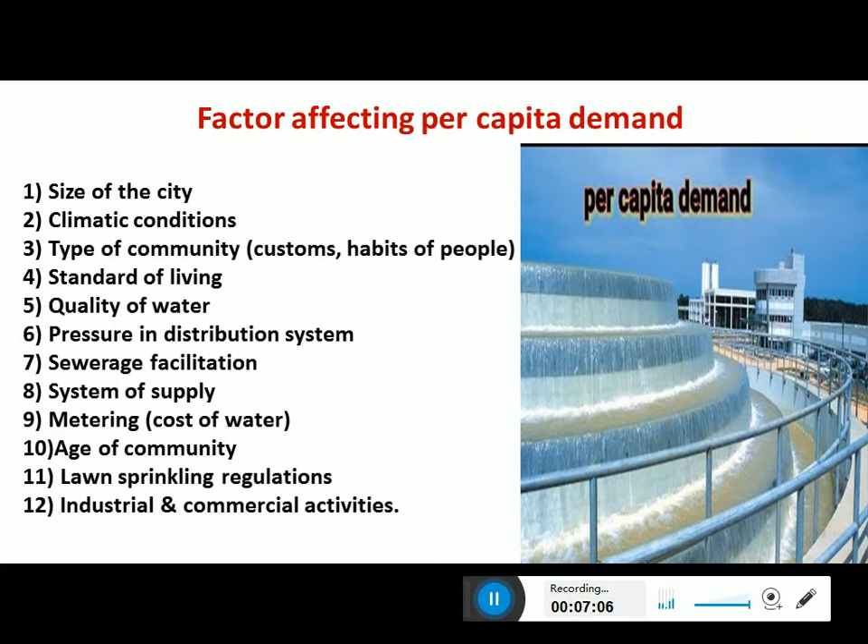In hot climatic conditions, we tend to use more water. In cold climatic conditions like winter and rainy season, we use less water. Status and habits of people matter too - if the standard of living is rich, they may use more water, while rural areas and poor communities use less water.

Availability of sewerage system also matters - more water is used when there is a proper sewerage system, whereas less water is used when there is no sewerage system. It also depends on the rate of water - more water is used if the cost is less, and less water is used if the cost is more. Then type of water supply - if it is 24/7, more water is used; lesser water is used if there is intermittent supply.

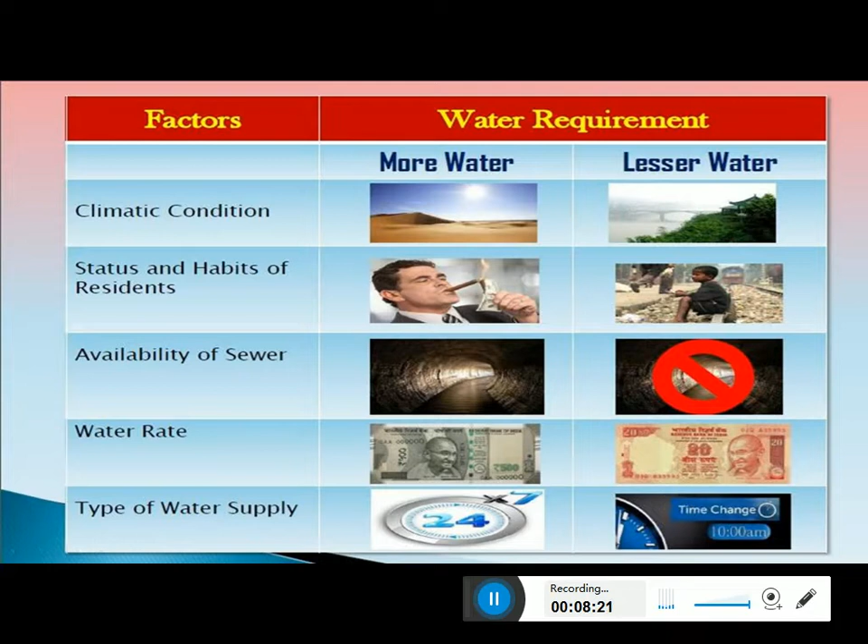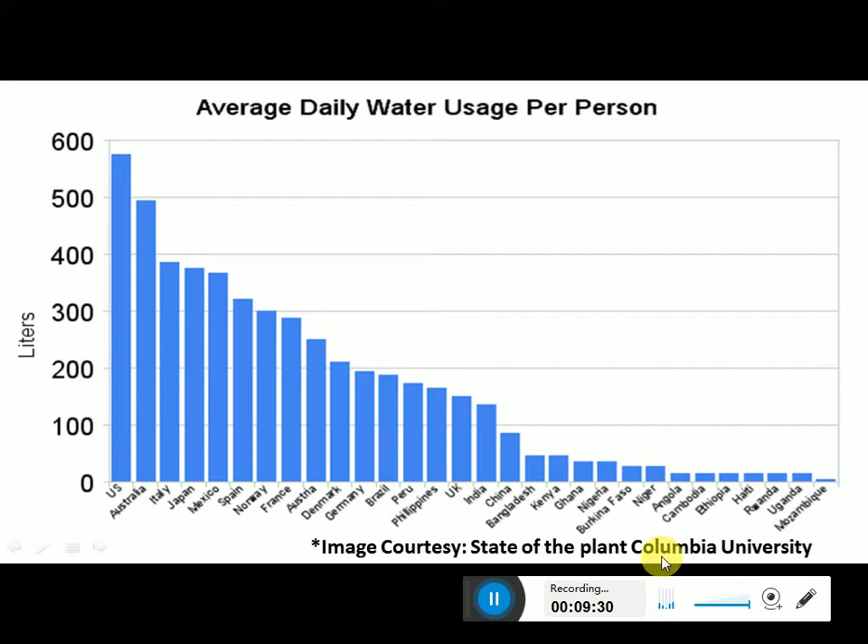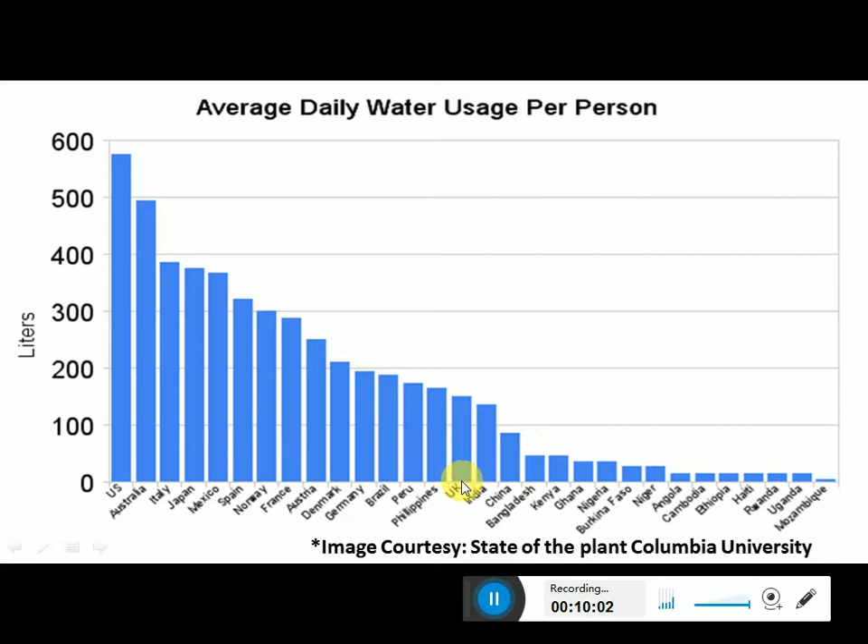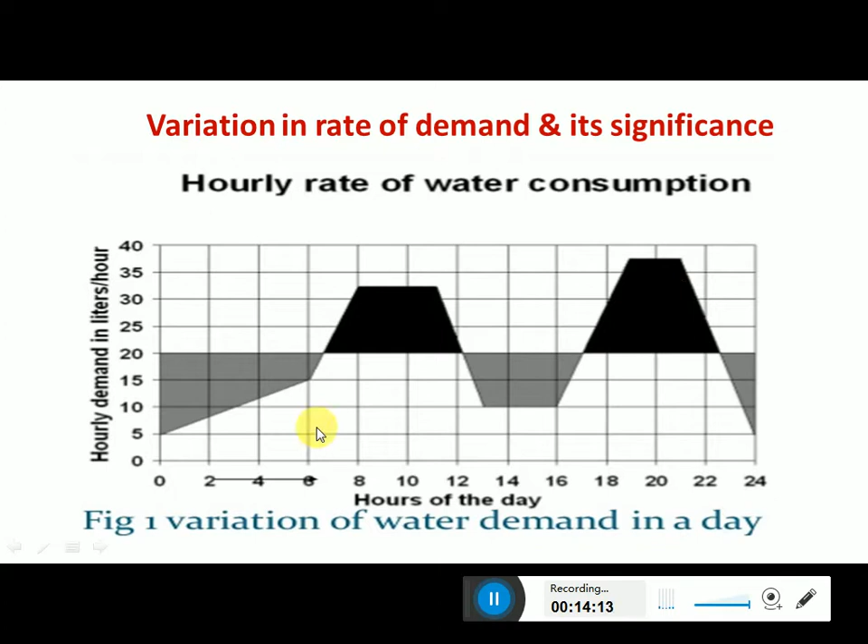Seasonal variation will also happen. The demand peaks during summer, and fire breakouts generally are more in summer because of issues like short circuits, or sometimes fire catching dry material or wooden logs stored somewhere, because of the higher temperature. So there have been more fire breakouts seen in the past during summers.

So apart from the hourly variation which you have seen, you might also see the seasonal variation. These things are required to properly plan the water supply scheme, considering the various types of variations.

You might also see the daily variation, which depends on the activity of the people. People draw out more water on Sundays and festival days, increasing demand on these days. Water planners should be aware of these variations so as to properly and effectively supply water for the users. On Sundays people have many activities, like washing vehicles, consuming more water, and spending more time indoors, so there may be more requirement of water.

Also on festival days, people wash their vehicles and consume more water, and then they invite guests. Because of that there may be more usage of water, and that is called the daily variation.

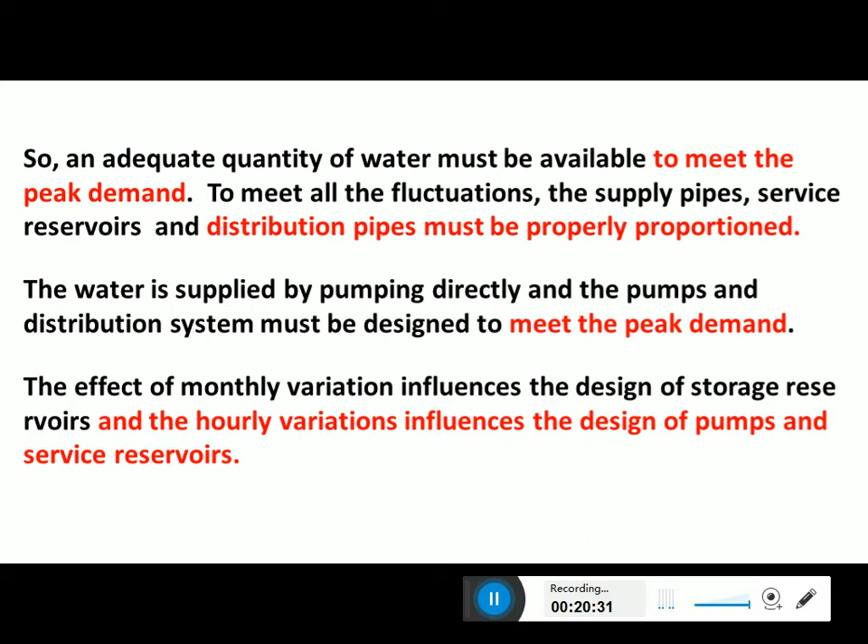And also, to supply the water, the hourly variations are important, because we have to pump the water from long distances, so that equal pressure should be maintained in the distribution system, so that all users get a good amount of water with proper pressure. So the design of pumps depends upon the hourly variations.

So it is possible to go further from a daily demand to hourly demand. As you have seen, the water usage in a day is not constant, and generally we see two peaks, one in the early morning and one in the late evening.

Considering this, the annual average demand needs a holistic and macro scale analysis which cannot be used to actually calculate the exact demand. For most cases, the yearly demand will not give a true picture, and hence we have seasonal demands which are also not proper, because seasonally it is a very huge bandwidth, so it will not give a true picture, and yearly demand will also not give a true picture.

So the main reason we delve as much into hourly demand is for design aspects of pipes, because the pipe should be designed for the hourly demand. We cannot decide the pipelines based on seasonal demand or annual water demand. So for most water supply schemes and appurtenances, we will go for the hourly demand for design aspects. Although the seasonal, hourly, and yearly demands are all important, for design purposes we take the hourly demand into account.

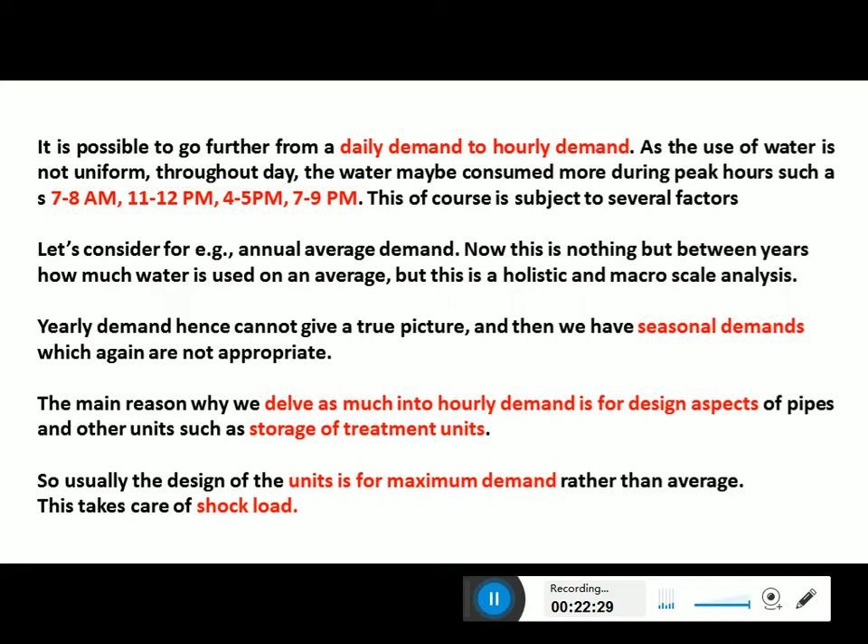Usually the design of units is for maximum demand rather than average demand. We'll see what is this maximum demand, average demand, and peak demand in the next slides.

These are some of the terminologies used in water demands. The first one is average annual demand: the total volume of water delivered to the system in a full year, expressed in liters. When demand fluctuates up and down over several years, an average is used. This is called average annual demand, the total volume of water required by the system per year, in liters.

Then we have average daily demand, abbreviated as ADD: the total volume of water delivered to the system over a year divided by 365 days, giving the average use in a single day, expressed in liters. That means how much water is used in one day is called the average daily demand. In a year we have 365 days, so we divide by 365 days to get the water demand for one day.

Okay, then maximum monthly demand: the liters per day average during the month with the highest water demand is called the maximum monthly demand. The highest monthly usage typically occurs during a summer month, like we have discussed in the previous slide that during summer we use more water.

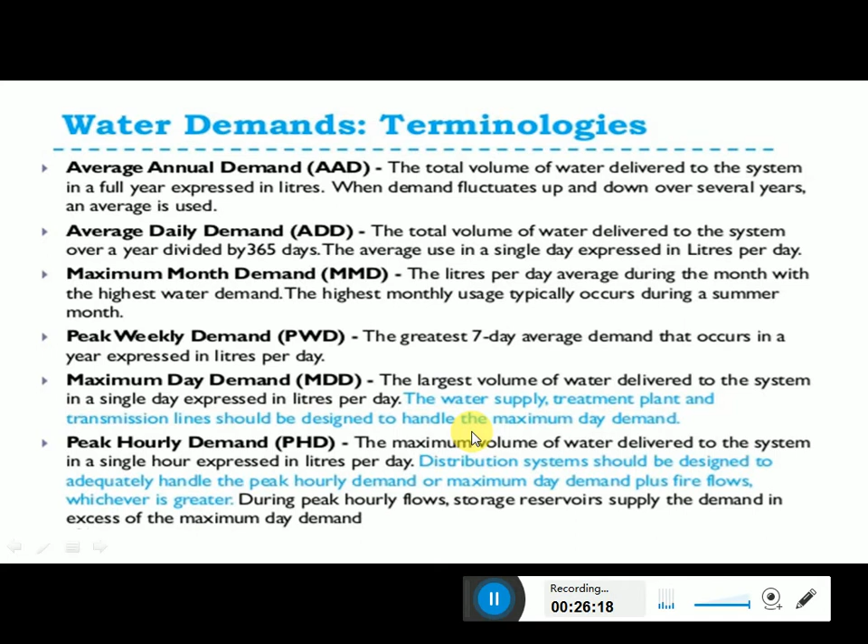All are important, but you have to mainly concentrate on average daily demand, maximum daily demand and peak hourly demand, because these are the things which are taken into consideration for the design of water supply treatment units. Okay, here you can see the relationship between various types of demand.

Maximum daily demand is given by 1.8 times the annual average daily demand. Okay, so this is MDD, maximum daily demand. Similarly, maximum hourly demand is given by 1.5 times the average hourly demand. So maximum hourly demand is given by 2.7 times the annual average daily demand.

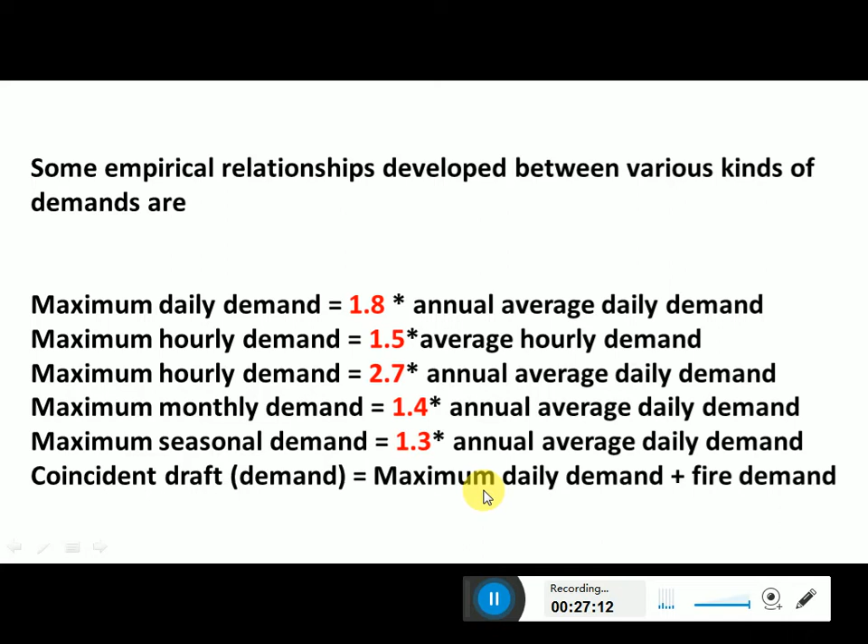Maximum monthly demand is given by 1.4 times the annual average daily demand. Maximum seasonal demand is given by 1.3 times the annual average daily demand. So coincident draft or demand is equal to maximum daily demand plus fire demand. Okay, so this is the relationship between various kinds of demands and the multiplying factors.

So maximum hourly demand of maximum day, that is peak demand, is given by 1.5 times the average hourly demand, or 1.5 times maximum daily demand divided by 24, or 1.5 times 1.8 into average daily demand divided by 24, or 2.7 into average daily demand divided by 24, or 2.7 into annual average hourly demand. Okay, so these are the relationships between the various types of variations in the demand.

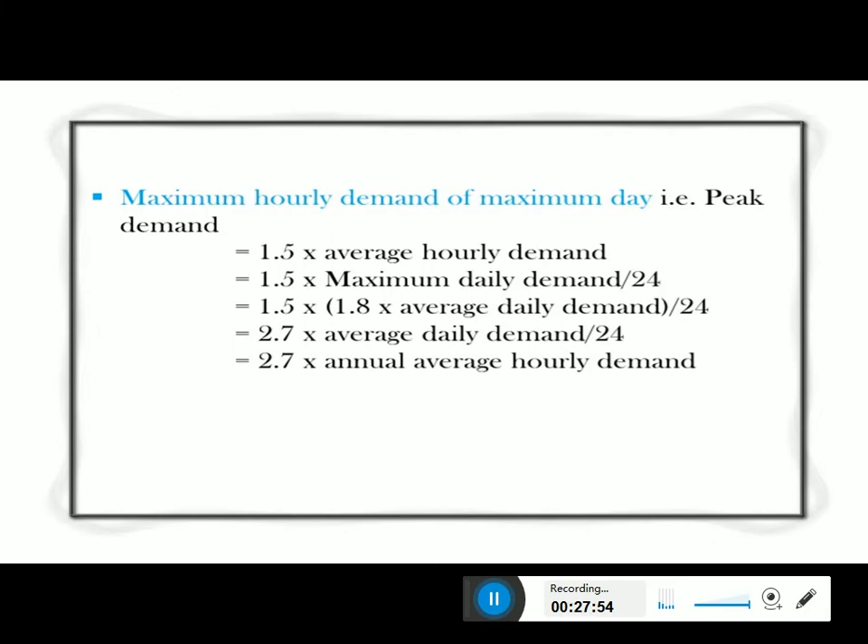Okay, so peak water use estimation is given by the Goodrich formula. It estimates maximum demand based on the time period for which maximum water demand is desired for the community. When annual average per capita is given, then P = 180 × T^(-0.10), where P is percentage of average annual rate, that is volume per day used in the period of time of interest.

T is the length of period for which peak demand is required. Okay, so the daily rate based upon a maximum hour is approximately equal to 150% of the average annual daily rate. So this is the Goodrich formula for estimation of average daily rate.

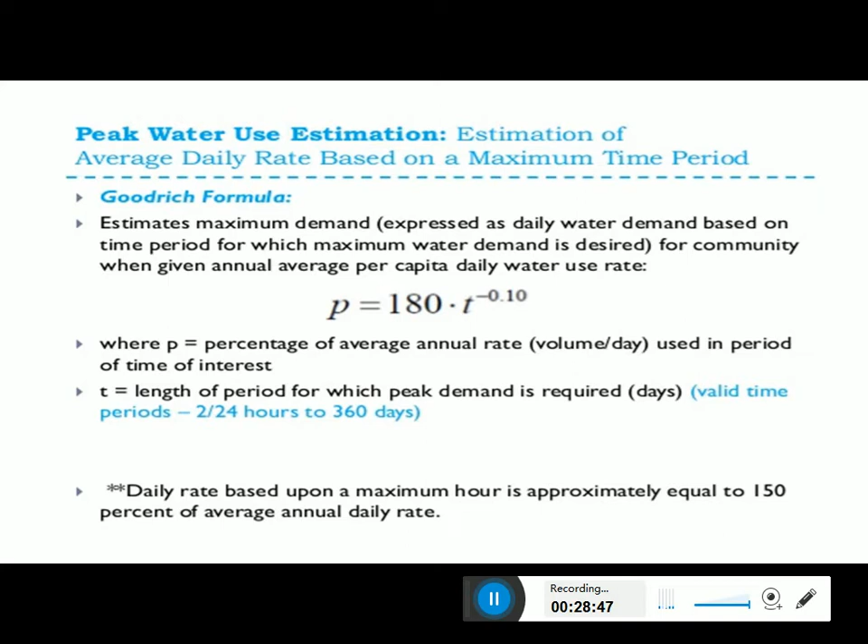Okay, so this is the example to find out the fire demand. The fire flow of 37,000 liters per minute, or in terms of discharge in meter cube per second, must be maintained for at least 9 hours. The volume to supply the fire demand is given by V fire equal to the discharge multiplied by 9 hours into 3600 seconds per hour.

Okay, so that is equal to 20,100 meter cube. The emergency storage can be taken as the average daily demand.

So V emergency is given by 2,50,000 people into 600 liters per day per capita, which is equal to 150 into 10 raised to power 6. That will be equal to 1,50,000 meter cube.

The required volume of the service reservoir can be estimated by V total equal to V peak plus V fire plus V emergency. So that is equal to 67,500 plus 20,100, then 1,50,000 meter cube. Totally that will be equal to 2,37,600 meter cube.

And for this capacity we have to decide the storage reservoir, considering fire demand also into account. Whenever we need water for extinguishing fire, along with the regular water demand, we will take the emergency storage and also the fire demand into account for deciding the service reservoir.

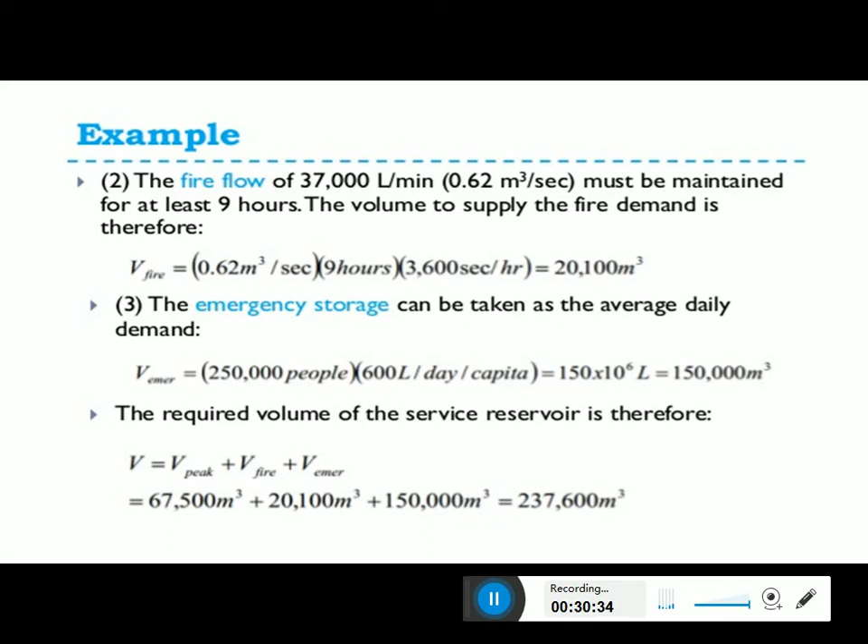Okay, so design period and population forecast. This quantity should be worked out with due provision for the estimated requirements of the future. The future period for which a provision is made in the water supply scheme is known as design period. In the previous slides we have discussed that water supply schemes are usually designed for 3 to 4 decades, that is 30 to 40 years. So we need to take care of the future period. That period is called the design period.

That means here you can see we have to store the water and we have to supply the water. This is the reservoir and this is the water which is stored. The water should be treated, then supplied from the water supply department to the users. The construction of these dams and reservoirs for the water supply system involves huge cost and investment, so careful planning must be made to design water supply schemes.

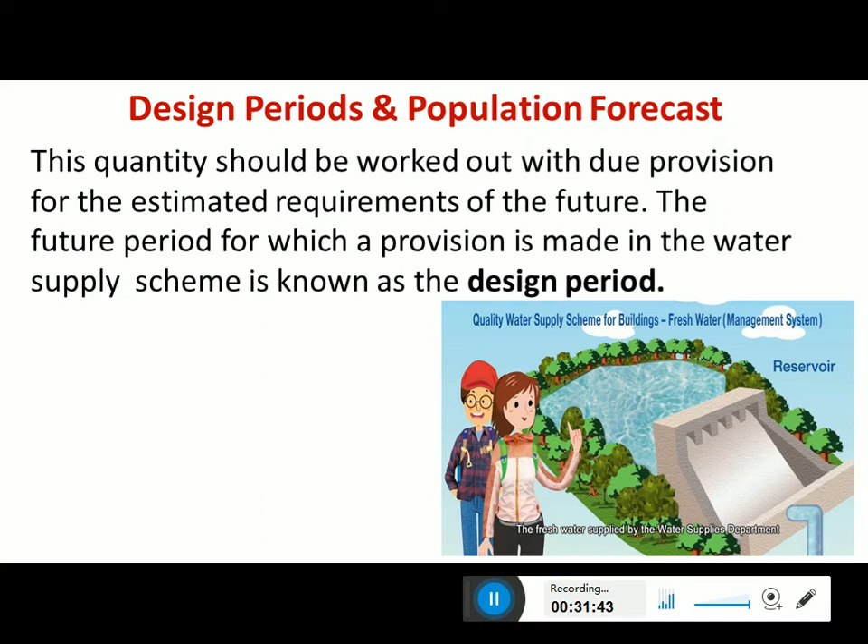A water supply scheme involves the construction, installation and commissioning of several units, large structures, peripherals and a few underground structures. These are not usually easy to replace, repair or expand at very short notice. Hence water supply schemes are usually meant for the town looking at its future rate of growth. It is most viable to construct it inclusive of all expansions, that is, the units must be laid larger than the current requirements so they also satisfy the future demands.

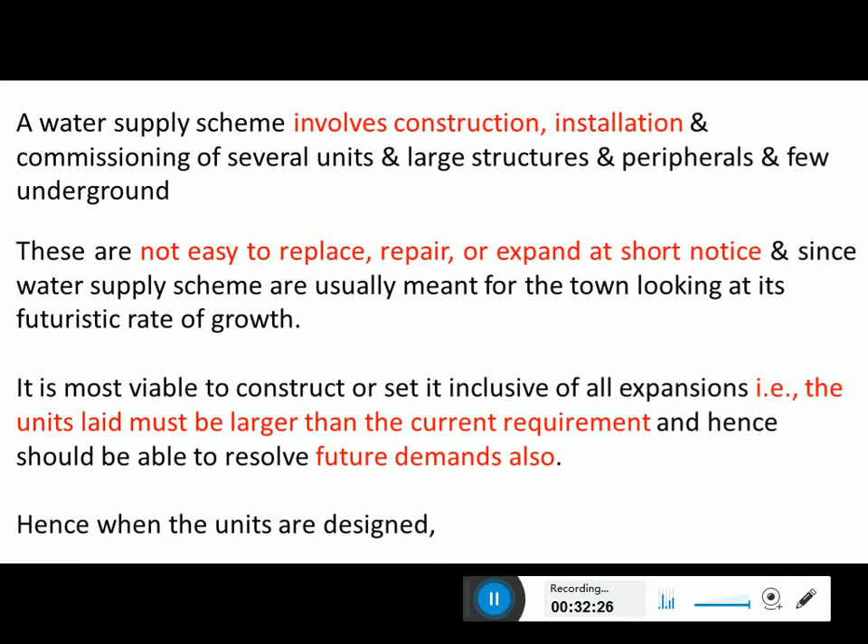Hence when the units are designed, the present population and the future population will be predicted, and the period should not be too long and also not too short. Hence an optimal life of the component structures should be taken into account. For water supply schemes, the design period is usually 30 years or 3 decades.

This means that the countdown of 30 years starts only after completion of the construction, that is after installation and commissioning. Once you finish all the construction of the water supply units, treatment units and all, from that time onwards the design period starts, and it is usually 30 years for water supply schemes. This design period should not be too short and also should not be too large.

Because if it is too short, we will be designing very small pipelines, small pumping units, small wells and all, which may not satisfy the requirement. And if it is too long, the pipe diameter may be more and the pressure may not be sufficient, and you may be spending more for pumping less water with high power cost. So a careful design period has to be estimated based on different factors.

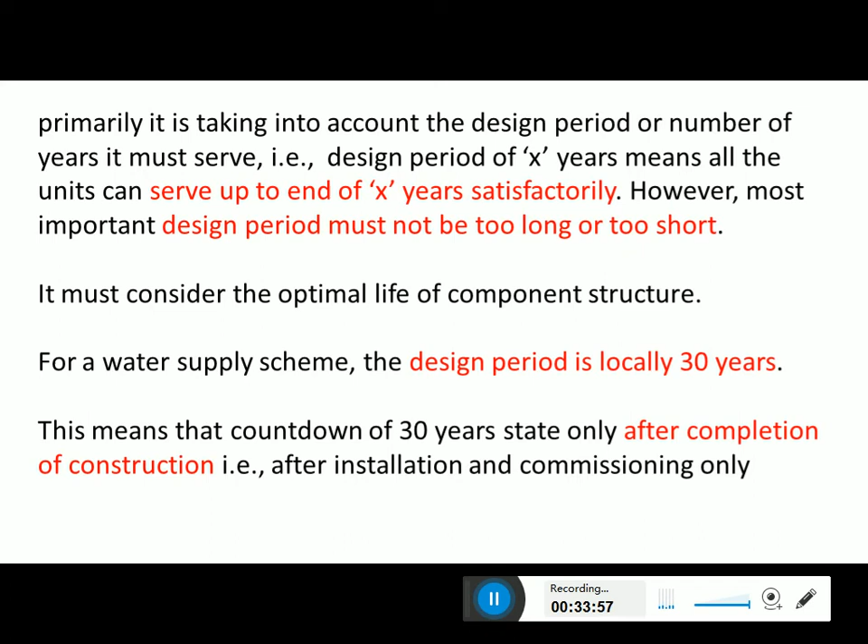Design period is estimated based on the following: the useful life of the component considering obsolescence, wear and tear, etc. The expandability aspect, that means how much expandability is there. Whenever a water supply scheme is planned, there may be some industrial growth or other growth happening in the area.

The anticipated rate of growth of population: there could be addition of new industries, development of commercial establishments, and also people migrate. You might have seen during COVID many people migrated from different places in search of food and jobs. So migration, birth rate and death rate are also important in deciding the design period. The development of the area will come into picture when you are designing a water supply scheme.

And the available resources, in terms of water and also financial resources. Finance and resources are very important factors which should be taken into consideration before designing a water supply scheme. Then performance of the system during the initial period, how the system is going to perform during its initial days.

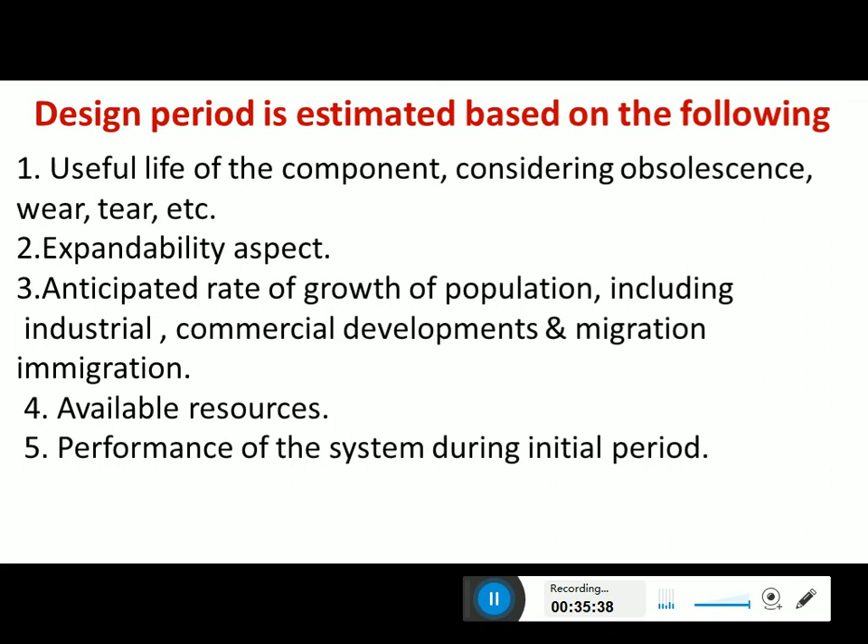Okay, so that is also important in designing the design period. The life of the component, that means what kind of pipe material you are selecting, what is the life of those pipes, and what pumps you are using, and what is the life of those pumping units. So when you should change the pumps, all those things should be considered for the design. Okay, so these are some of the design periods for various water supply system works, which are given here.

For storage reservoirs, the design period is 50 years. Since a reservoir is just a structure, you don't have any pipes, pumping units or electrical parts, so the design period is usually more, up to 50 years. Then you have infiltration works like intake structures and other structures, the design period is 30 years. Pipe connections are for 30 years. For distribution systems it is 30 years, or 3 decades.

For water treatment units it is 15 years. Water treatment units consist of screening units, which are made of mild steel. You have locomotory and moving parts made of electromechanical components, and there could be frequent wear and tear, and they need replacement because most of the units are submerged in the water. That's the reason the design period is relatively less for water treatment units and electrical motors and pumps.

Because if you use pumps for more than 5 or 10 years, their efficiency starts to decrease. Hence the maximum design period is 15 years. Usually for pumps it will be 5 or 6 years maximum, so we should start to replace the pump because the efficiency starts to reduce after 5 or 6 years. So careful consideration has to be made before deciding the design period. Otherwise, for most water treatment plants, you can take it as 3 decades, except the water treatment units and the pumping units.

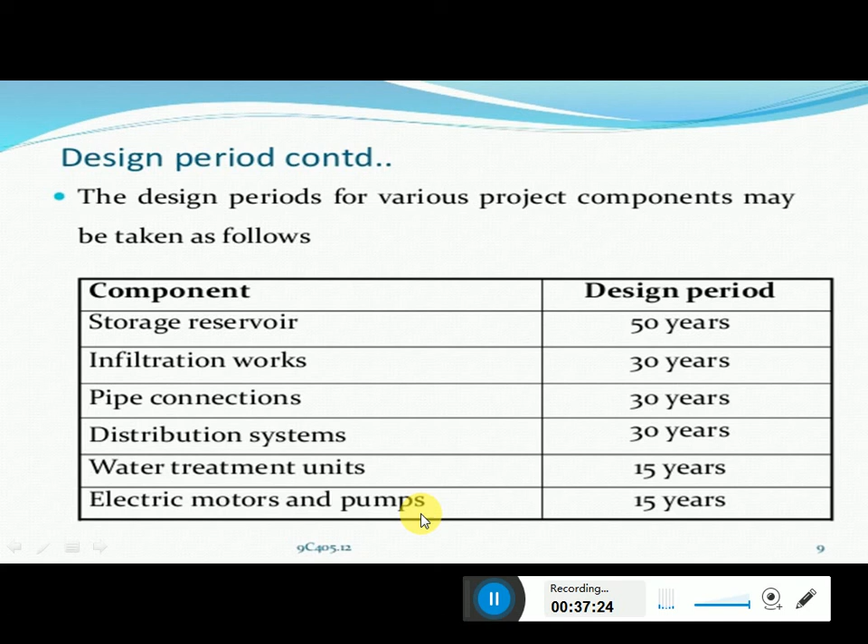So these are some of the factors, that is, the financial liabilities. If we have less money, the design period can also be small, as you cannot invest in more construction materials, and if the rate of interest is less, there will be a high design period. Then expected development and changes in population and influence of commercial and industrial growth: if you see a constant population growth, we can go for a higher design period, up to 40 or 50 years. If there is rapid commercial and industrial growth and a sudden surge in population, we should keep the design period at 30 years or minimum.

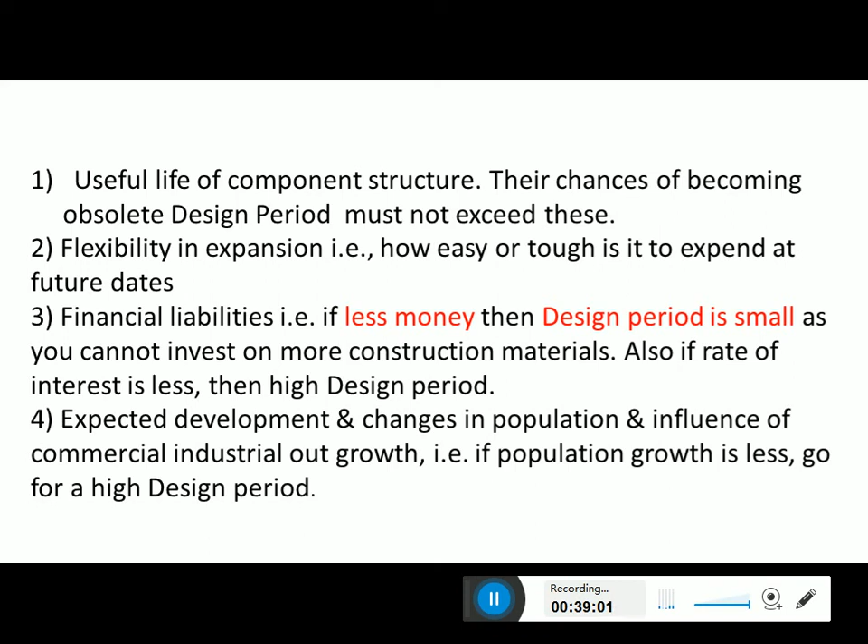It is very difficult to predict all those changes, because nowadays the world is changing rapidly, but still we can have some futuristic idea, scope and vision for the future. Considering that, we have to decide the design period, because we spend a lot of money on infrastructure for water supply schemes, including pipelines, concrete structures, dams, reservoirs, pumps. We have to do a lot of excavation, sometimes damage roads, then backfill the earth. So careful calculation has to be made before deciding the design period.

So to summarize, we have discussed per capita demand, the factors which affect per capita demand, what design period is, the design period for different water structures, and different types of demands, like peak demand, monthly demand, average daily demand, maximum daily demand. Concentrate more on average daily demand, maximum daily demand and maximum peak hourly demand, which are usually required for design of water supply schemes. We will use these terms again while solving numerical problems, so keep those things in mind.